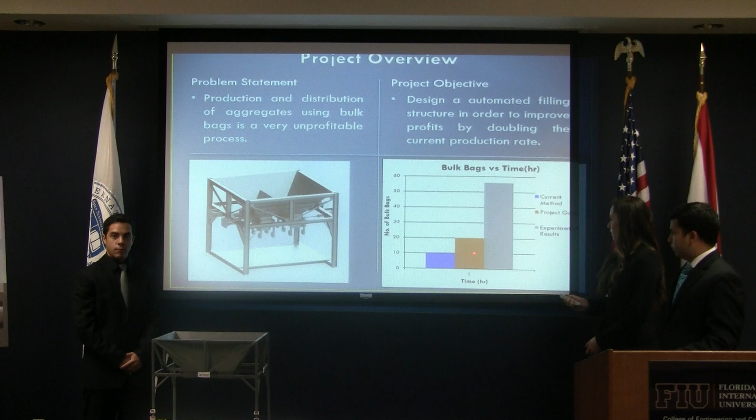As you can see here in this lower corner, this is our SolidWorks final design model, and in this chart here to your right, it shows the success of our project. As you can see, not only did we pass our goal, but we saw an improvement of 82% to their current method.

So why this project? Currently, there's no mass production process for the filling of bulk bags. This process is done completely manual with shovels and this front-end loader. This process is unsafe, inaccurate, and very unprofitable. We see issues such as wasted time, wasted material, and unnecessary labor.

As you can see in this chart below, it currently takes Titan America an average of 1 hour to fill 10 bulk bags. And again, to improve profits, our project goal was to double their production rate, so 20 bulk bags per hour.

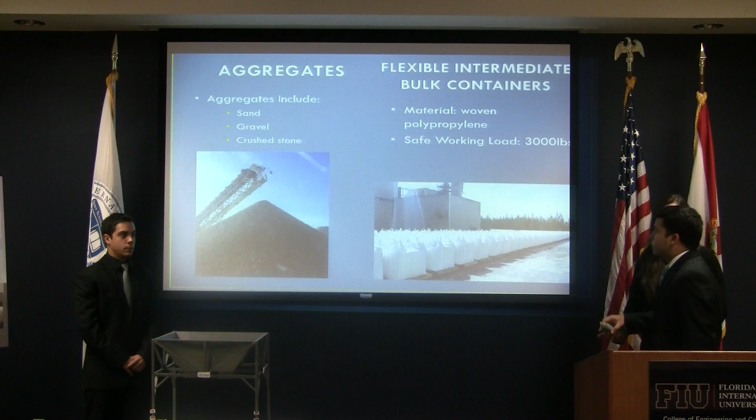So what are aggregates? Aggregates is the most mined materials around the world. We can see aggregates used for any type of construction, like a building, the streets, the roads, and its aggregates include sand, gravel, and crushed stones.

So one of the ways to transport and store aggregates is in flexible bulk, intermediate bulk containers, most known as bulk bags. These bulk bags are made of woven polypropylene in order to be rip resistant. These bags have an average weight between 5 to 7 pounds itself and a load resistive factor of 1,000 to 4,000 pounds. Titan America at the moment uses these bags of 35 by 35 by 54 inches, for about 38 cubic feet per bag.

And also Titan America requests and sells the product at a weight of 3,000 pounds.

So Titan America has a lot of locations around the east coast of the United States, and the implementation of the automated bulk bag filler will increase the profit around the country, and as well allow Titan America to be a global distributor of aggregates.

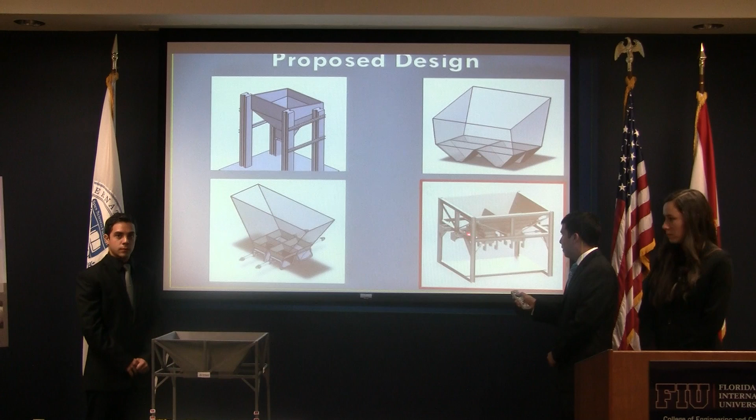So these three pictures show our conceptual ideas. After that, like Deanna explained, this is our final design of the proposed design that includes all the parts that we presented to Titan America.

So in order to understand what our final design looked like, I'm going to break it down into 3 components. Our first component is the hopper. The hopper has an overall dimension of 14 feet by 14 feet by 6 feet in height. This is the top dimension, and it has a total volume of 23.3 cubic yards. This hopper was reinforced with ribs in order to ensure rigidity of the hopper.

Inside the hopper, we designed this cross-section that is 10 feet by 3 feet by 2.5 feet high. This cross-section allowed for the material to be evenly distributed through all 4 gates. So when the loader loads the material right in the middle, it makes sure that every bag has the same amount of material.

Now, in order to fill this one hopper, it would take 3 buckets of the WA500 Komatsu front-end loader that we use. With 1 full hopper, we were able to fill an average of 17 to 20 bulk bags, which was one of the goals set by Titan.

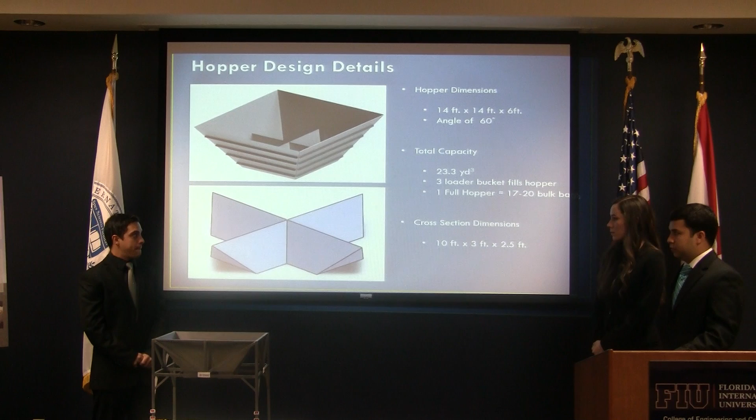The next section that I want to speak about is the overall structure. Now, there's 3 main components that I want to speak to about the structure that made it unique and reinforced. The first is a cross-section that you see there. This cross-section allowed for the hopper to actually sit on there and support most of the weight when the material is set on top of it.

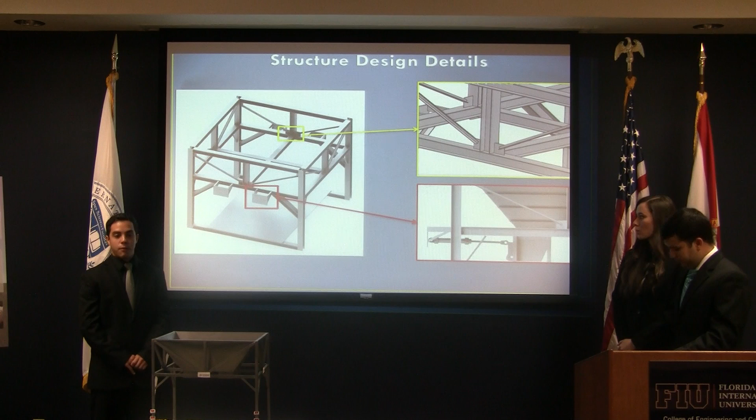The next part that I want to speak about is these cross-section members and connector plates and angles that help form a triangle structure and also distribute the weight when the hopper is full.

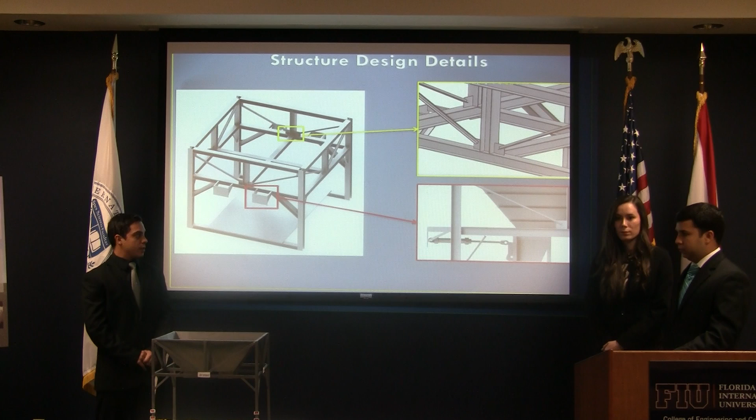The last component that I want to speak to you about is the piston brace. This brace was designed and done in order to make sure that the piston opened up as required in order to fill the bulk bag appropriately. So the length of the brace itself from beginning to end was measured to make sure that the opening is not too large for the bag.

The next component is the gate itself. It's a half-moon shaped gate that is 2 feet by 2 feet by 1.6 feet high, with a degree of 70 degrees. This degree was chosen specifically to reduce the flow of material from 60 degrees to 70 degrees, so the material does not hit the scales or break anything.

The next component is the piston. This piston was chosen for 2 reasons. One is the pull force we calculated, which is 17,000 pounds. This pull force was calculated to make sure that when all the weight of the material was sitting on the half moon, it would be able to open and close without any problems. The second reason we chose this piston is that it's commonly used around the plant, which makes sure that if it breaks we have easy access to replace it, and also we can buy it in mass quantities to reduce cost.

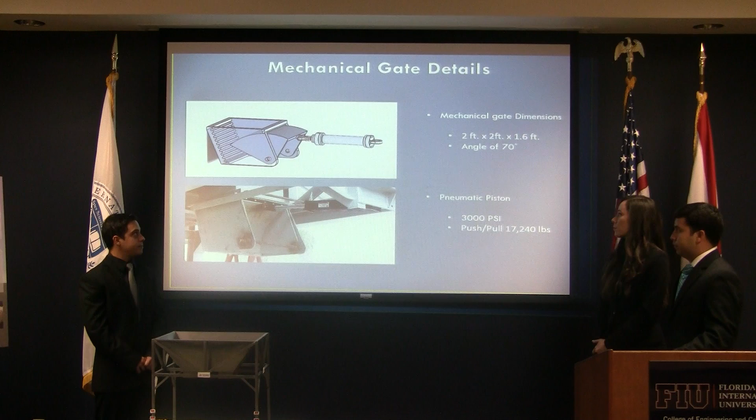Once our designs were established, we performed simulations for each individual component and for components in assembly. This was done to make sure each component design would perform under what it's exposed to. We will only show simulations for the hopper and the structure because we determined these would be the most important, but all other simulations can be found in our report.

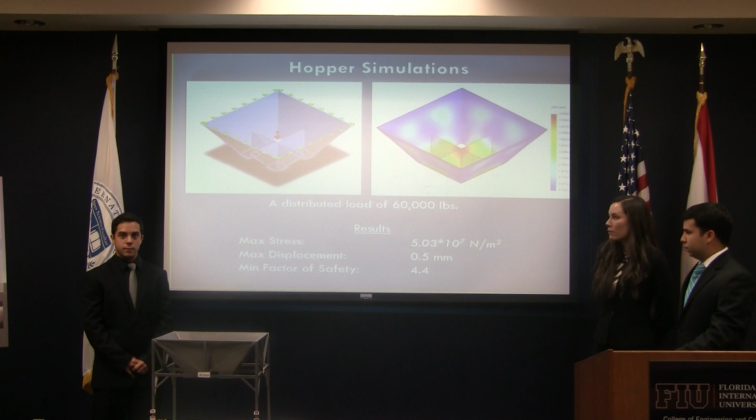The results we found were a maximum displacement of 0.5 millimeters and a minimum factor of safety of 4.4.

Our next simulation was of the structure. One thing to note is that this structure is of a previous design that we had submitted and was approved by Titan. All of the improvements and extra features mentioned earlier were added during production. However, for this simulation it was set up similar to the hopper, with a distributed load of 60,000 pounds. The results we found were a maximum displacement of 0.01 millimeters and a factor of safety of 5. All of the components we simulated had factors of safety well above the required 2, and were therefore determined to be a safe design by our team members and Titan engineers.

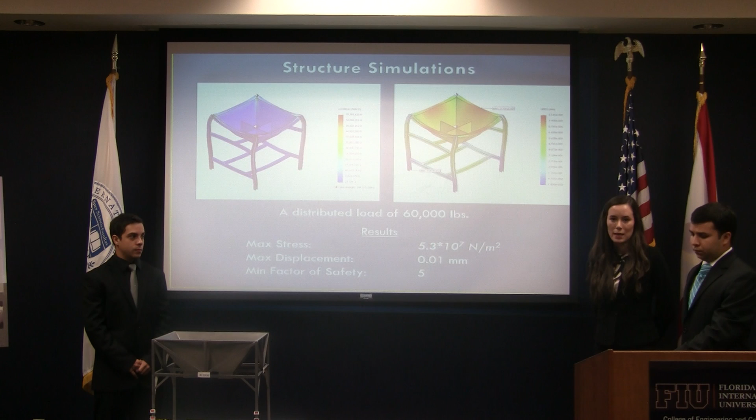Our next step was the prototype. As you can see here on the table, this prototype was built for the purpose of testing the flow of material, in order to get a better idea of the impact this structure design will have on the production rate. This prototype was built on a scale of 1 foot to 2 inches and was made of balsa wood.

The material we used was taken from Titan's plant, and these cups represent the bulk bags. In the table below you can see the comparisons. Again, the current method is 10 bulk bags per hour. Our goal was to double the production rate, so 20 bulk bags per hour. Through several trials of experiments, we found an average of 56 bulk bags per hour. With this design, that is an 82% improvement over the current method, and a 64% improvement over our goal. With these results and the simulation results, everything was presented and approved by Titan.

Due to the promising results, we were given the budget and approved for full-scale production.

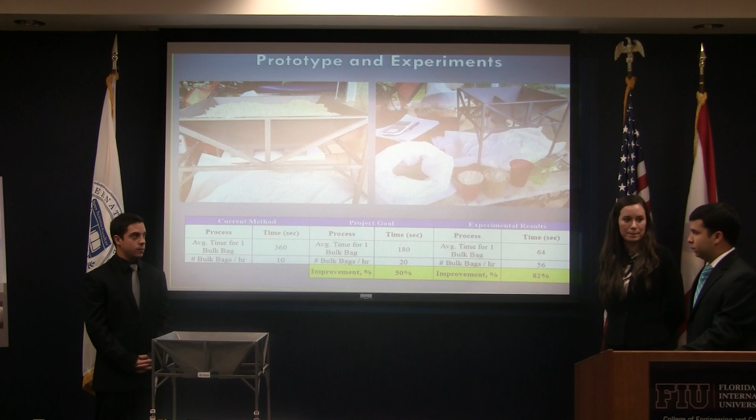The next step was to make the structure. This was done after the hopper to make sure the dimensions were exact and the hopper fit exactly to the structure. While those two were being done, we decided to make the gates. The gates were done very efficiently through mass production, since all 4 gates had exactly the same dimensions—each piece was cut the same way. The same side was cut 16 times because we only needed 4 gates. Once that was done, everything was placed, painted, and tested.

There are three main reasons for following standards: safety, cost, and compatibility. For welding, it's really important to follow the standards of the American Welding Society to ensure proper unification of the material and proper safety for the operators.

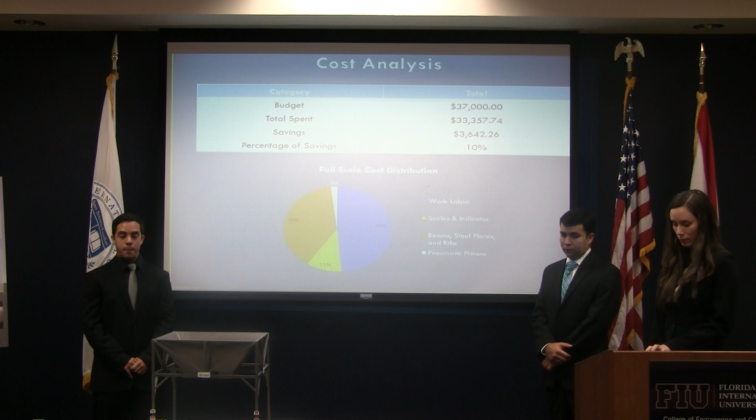Finally, what is the next step? The next step for our structure is to be placed in a location within Titan that is both beneficial in terms of efficiency and cost, making sure it's near all the stockpiles that will be loaded into the structure.

The next step is to run pneumatic lines and electricity for the scales. Finally, future work will include adding a PLC system that will allow the gates to shut off by themselves when the weight reaches 3,000 pounds.